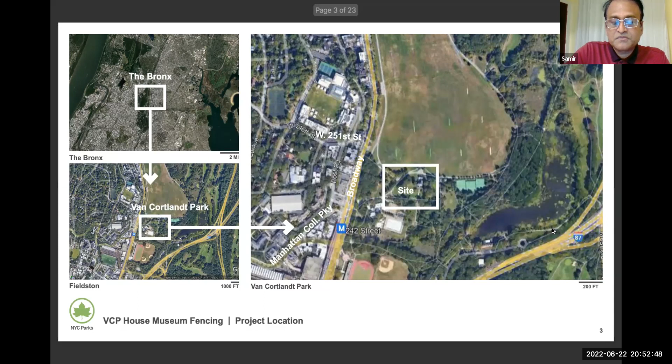This is outside of the flood zone. We talked quite a bit about the flood, so this is a relief that it's outside of the flood limit.

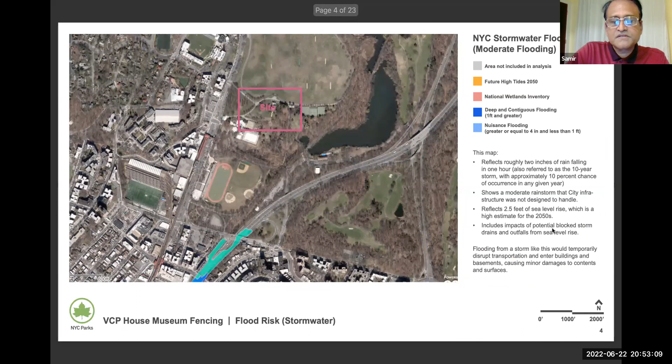This is also outside of the extreme flood limit, which is called the 100-year floodplain. So we are safe from a flood point of view.

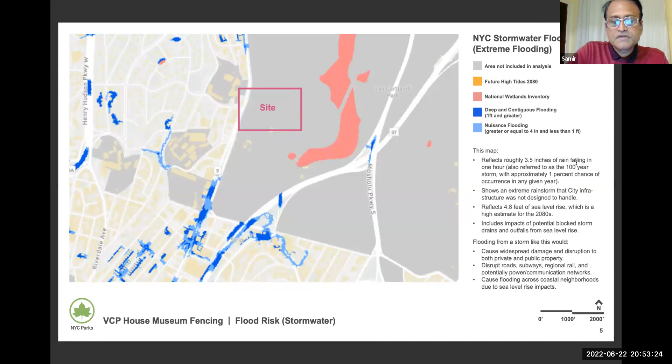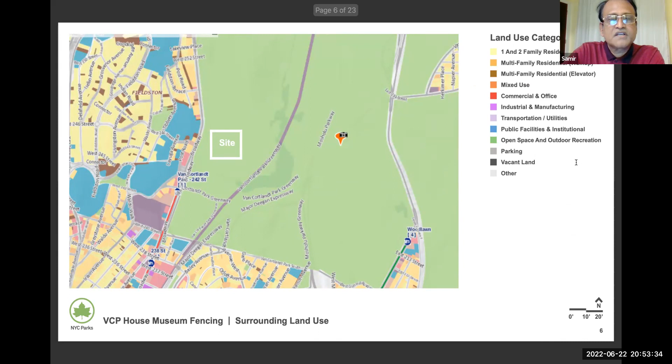This is surrounding land use. This site is surrounded by educational and some commercial land uses, as you can see.

There is only another park called Brust Park, about a 10 minute walk from this site, and there is no other park of that magnitude we are dealing with today.

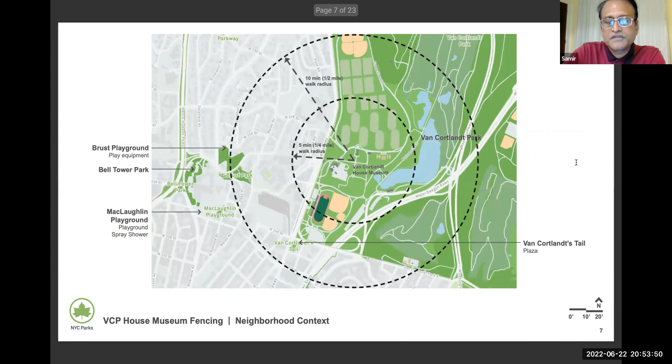The surrounding area of Van Cortlandt Park has a parade ground, comfort station, and a short walk to Broadway. That's pretty much what's happening surrounding this section of Van Cortlandt Park.

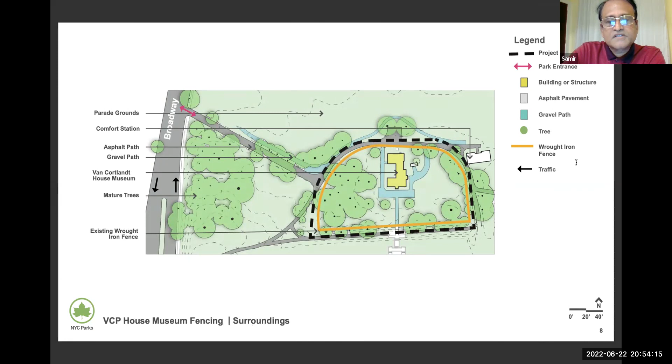Existing condition: the existing wrought iron fence surrounds the Van Cortlandt Park mansion. There are 3 gates, 2 in the north and 1 in the south, and they are all connected through a gravel path at the periphery.

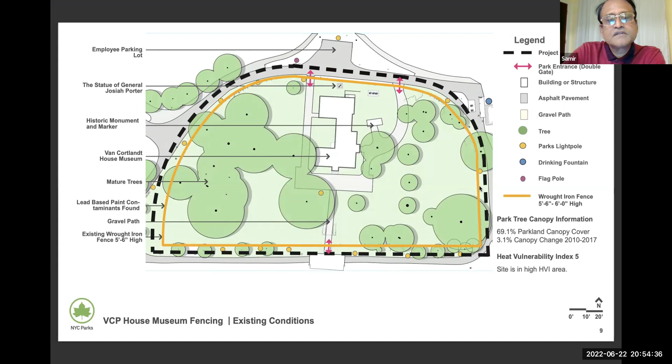This 1,300 linear feet of fence has many layers of lead paint, flaking and peeling off. We can see this in the subsequent slides for a better understanding of the current condition.

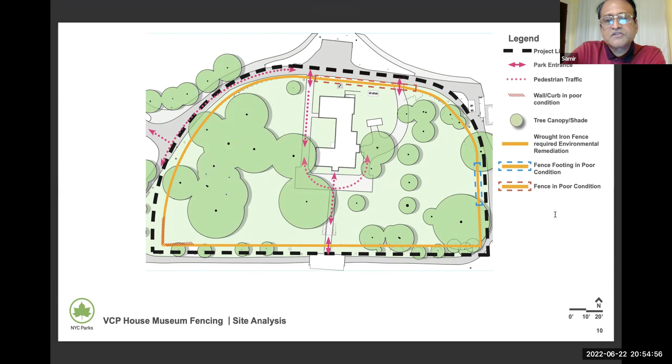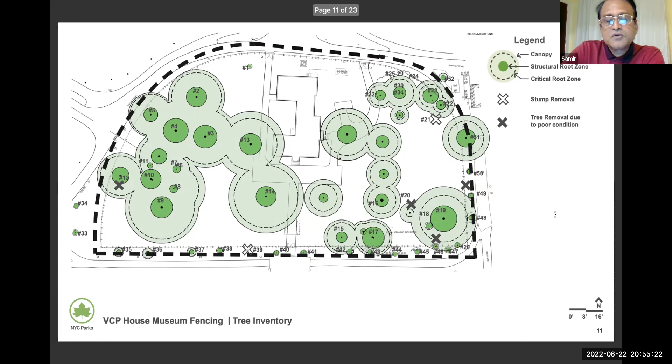Tree inventory: we did some tree inventory before looking into the site. We found only 3 trees, and they are in poor condition, so we need to remove them. We are not replacing or moving any trees because of the design work as such.

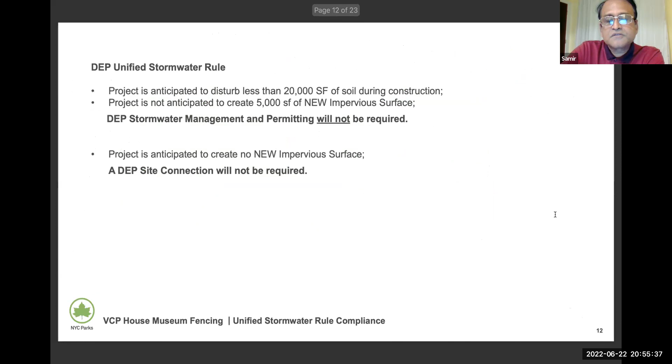Since we are not putting in any new impervious pavement or anything of that nature, we don't need a DEP connection typically called for.

The fence surrounding the mansion is in overall okay shape. With specific sections, there are some poor fences, so we are going to look at them.

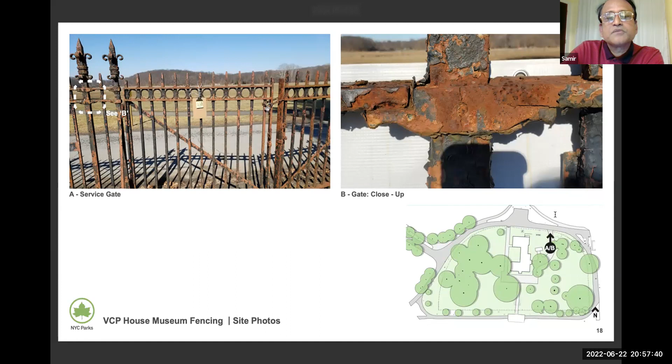Some more pictures just to give an idea of what kind of corrosion is taking place, especially damaging parts of the fence, the finale, and the top rail, bottom rail, etc.

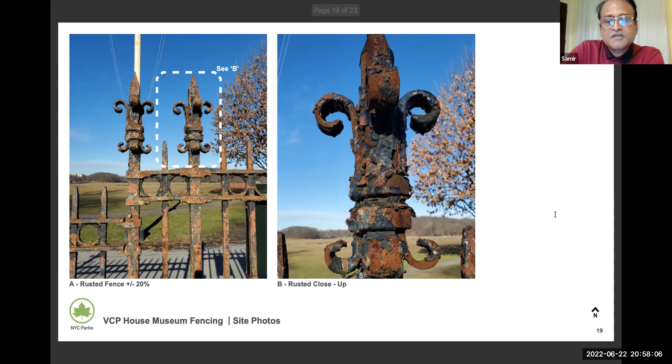These are kind of typical fair condition fence. That's why many of the fence will be preserved, or I would say reconstructed.

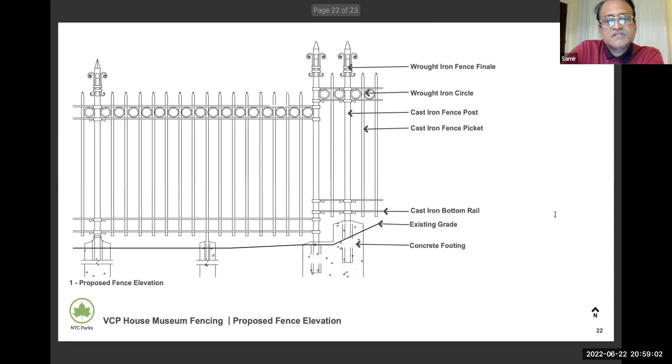So this is basically the fence diagram, which we call a schematic design. All fence posts will be remediated in place of the lead paint, and all fence panels will be remediated and repainted offsite.

The orange dash line is where the fence post will be refurbished on site, and the fence panel will be refurbished offsite. The pink line area is where the fence will be replaced due to poor conditions. The blue line area's fence will have new concrete curb and footing. That concludes my presentation. Thank you.

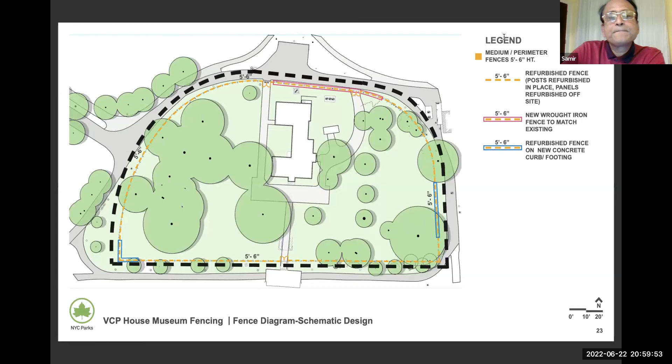What is the approximate time frame for the work itself? And will there be any paths or closings of any of the paths around the mansion? And will the mansion, I guess, be open as well?

The construction time would be about 1 year. For that year, we will have construction fence surrounding the whole place for the safety of the project, as well as the people and the properties inside. That's pretty standard procedure we follow, but the mansion will be open.

This is Renata from Parks. The mansion definitely will be open. We will maintain a separate pathway surrounded by the construction fence, so if there is no construction going on inside the mansion, it will be accessible to the public. We just want to make sure everything else is protected, and we may work with the Historic House Trust and Van Cortlandt Park Alliance on when the construction gate can be closed, and then the entire area will be closed after hours.

And then just as a follow-up question, would it impact any of the programming that's outside the mansion or the nature center?